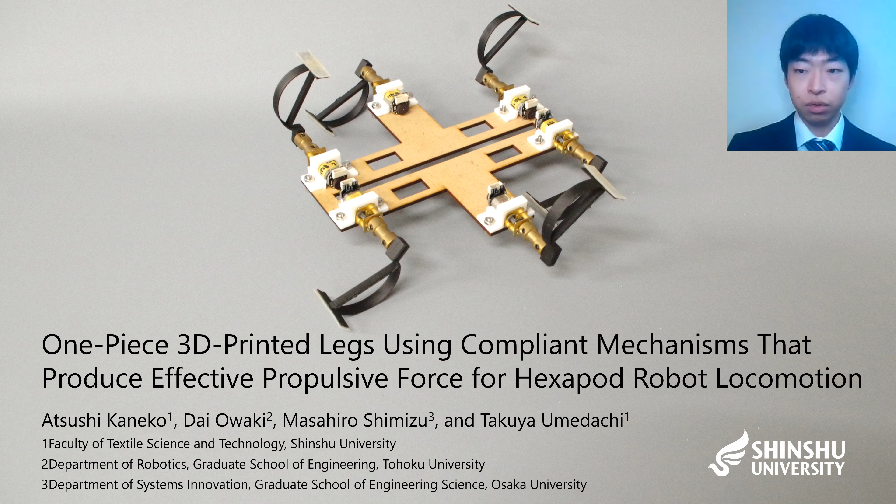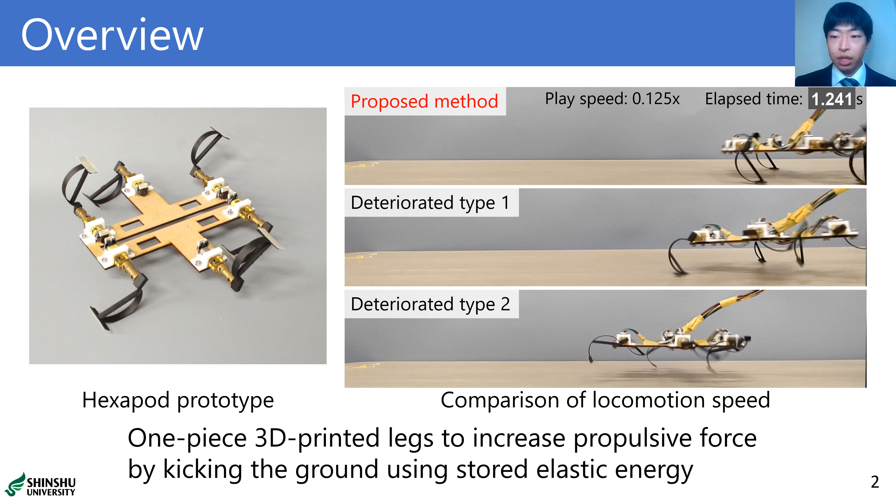We propose a leg design method for a hexapod robot that increases the propulsive force by kicking the ground using elastic force. Almost all parts of the leg can be 3D printed in one piece. Experiments are conducted to compare the proposed leg with deteriorated types. As shown in this video, some of the results indicate that the proposed leg improves the locomotion speed.

Let me call this spring stiffness the vertical stiffness in this presentation. Robots with high locomotion performance such as RHex were developed by adjusting the vertical stiffness closer to that of the animal.

In contrast to these studies, we aimed to develop a leg that increases propulsive force using elastic force with low fabrication cost.

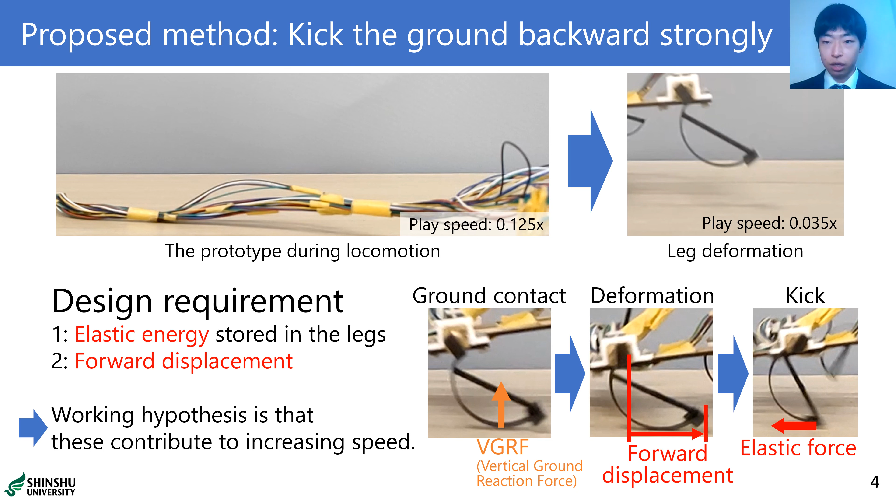Now I will explain how to achieve it, the proposed method. The concept is to increase the propulsive force by kicking the ground strongly backward using the elastic energy stored in the legs. We will explain this method using the locomotion of our hexapod robot.

Two candidate design requirements were devised to increase the propulsive force. The first is that the legs should store a larger amount of elastic energy when the ground reaction force is applied, to kick strongly. The second is that the toe should project forward at the moment to generate backward elastic force. The amount of this displacement was defined as forward displacement. The working hypothesis is that these design requirements contribute to increasing robot speed, and this is tested in the experimental part.

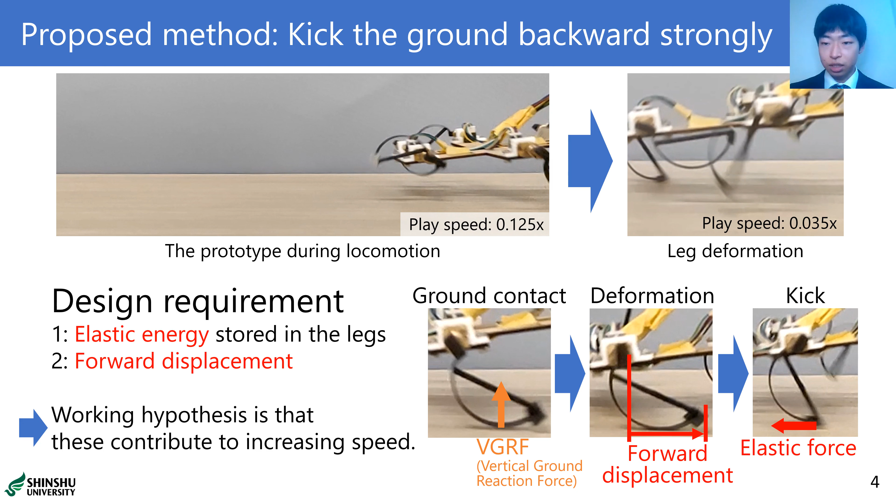Now let me move on to how to model a leg to conduct physical simulation. The leg consists of an I-shaped beam and C-shaped part, and a rubber part is attached to the toe to reduce slippage during the kicking motion. The entire leg is modeled as torsion and linear springs. The robot rotates its legs in this direction during locomotion.

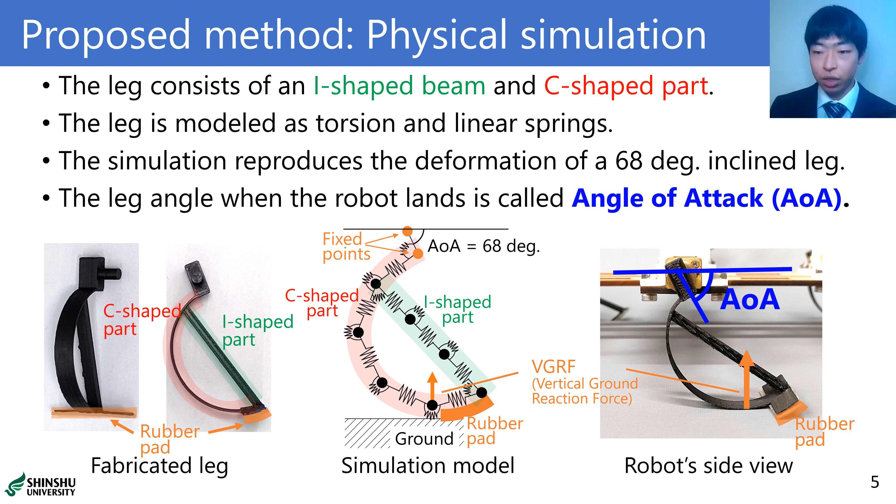A static simulation is performed to reproduce the deformation at the moment when the leg is inclined 68 degrees with respect to the ground. This is because we assume that the contact point shifts to the rubber part at this angle. The leg angle when the leg contacts the ground is called the angle of attack, which is one of the parameters of legged robots. In other words, the simulation best reproduces the leg deformation when the angle of attack is 68 degrees.

We then combine the simulation with multi-objective optimization. We use the 3D CAD system called Rhinoceros and its plugins for the simulation and optimization. This platform contains a physical simulator which simulates consequent deformation and a genetic algorithm for the optimization. This is an example of a Rhinoceros simulation.

The following three objective functions were set in the optimization. The first is to maximize the amount of elastic energy stored after deformation. The second is to maximize the forward displacement. The third is to make the vertical stiffness of the legs similar to that of an animal.

The following three values were set as optimization variables. First, the stiffness of the torsion springs in the I-shaped part. Second, the stiffness of the torsion springs in the C-shaped part. And third, the I-shaped part arrangement. Candidates for arrangement of the I-shaped part are represented by the green lines.

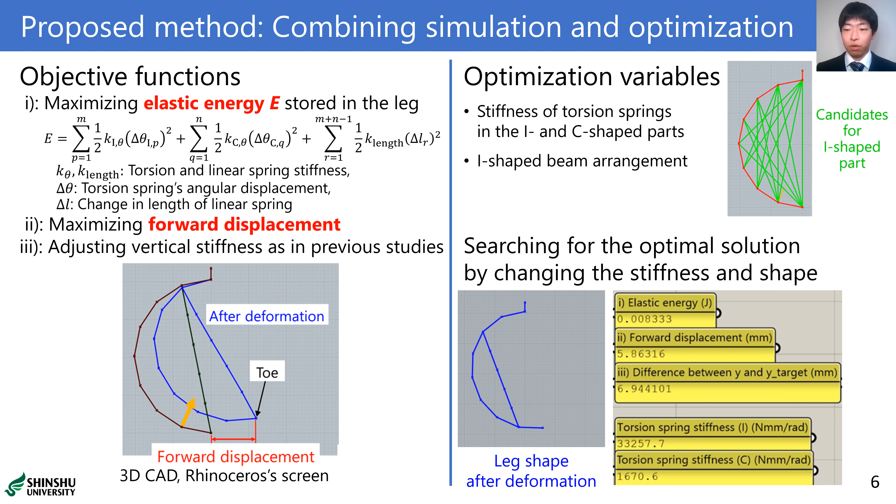Based on the simulation and optimization, we fabricated three types of legs: the optimized leg, and two deteriorated types for comparison. The whole leg, except for the rubber part, was 3D printed in one piece.

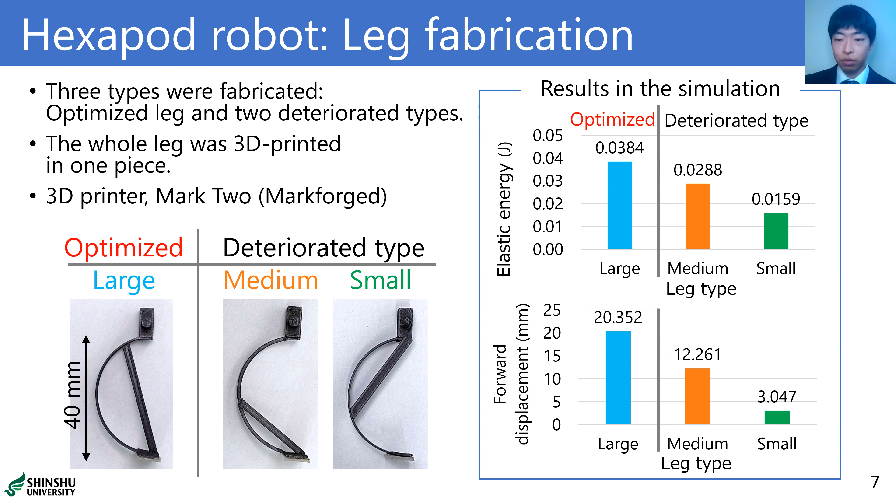The right plot shows each type's elastic energy and forward displacement obtained by simulation. The leg fabricated to achieve the shape and stiffness obtained by optimization is named large, because the optimized leg has larger elastic energy and forward displacement in the plot. The deteriorated types of legs are similarly named medium and small.

We implemented a control to adjust and specify the angle of attack to study the effect of leg deformation and angle of attack on locomotion performance. The angle of attack affects locomotion performance.

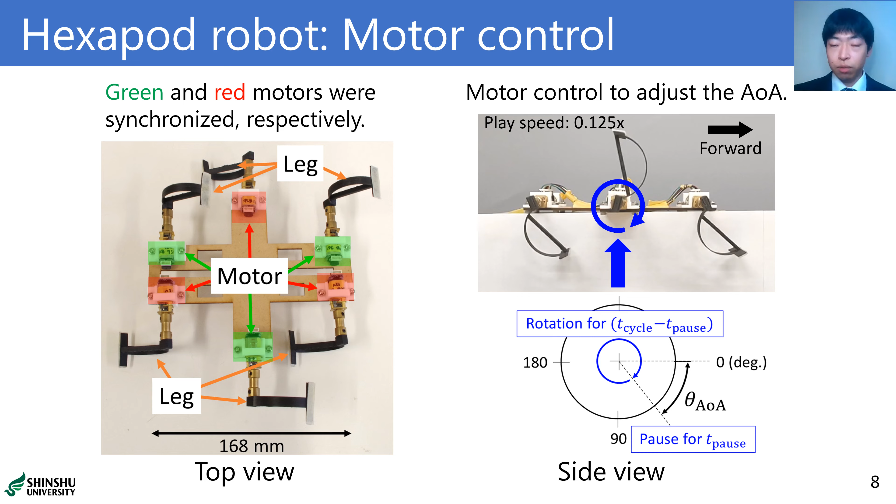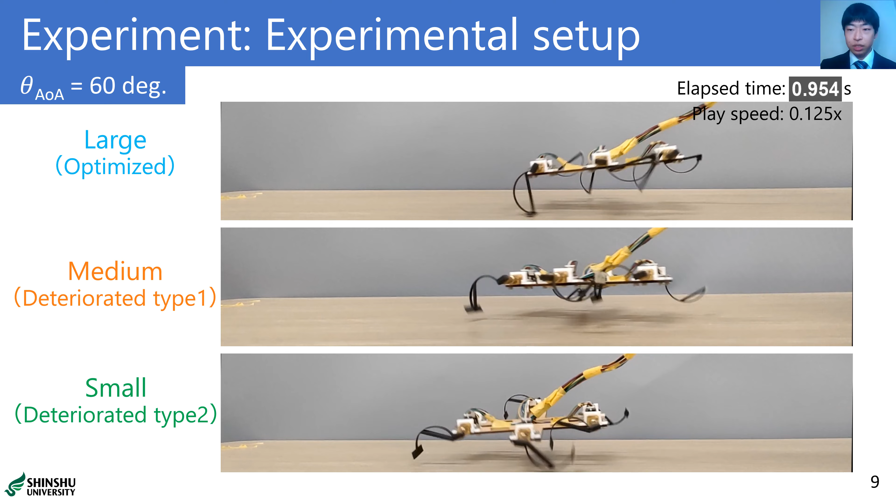Now I will describe the experimental setup. We conducted the experiment to investigate differences in locomotion speed by varying the leg type and the angle of attack.

Here are videos of the experiment when the angle of attack is 60 degrees. The robot traveled for 5 cycles in each locomotion experiment. The locomotion experiment was repeated 3 times for each setting. Then, the mean and standard deviation of the locomotion speeds were calculated.

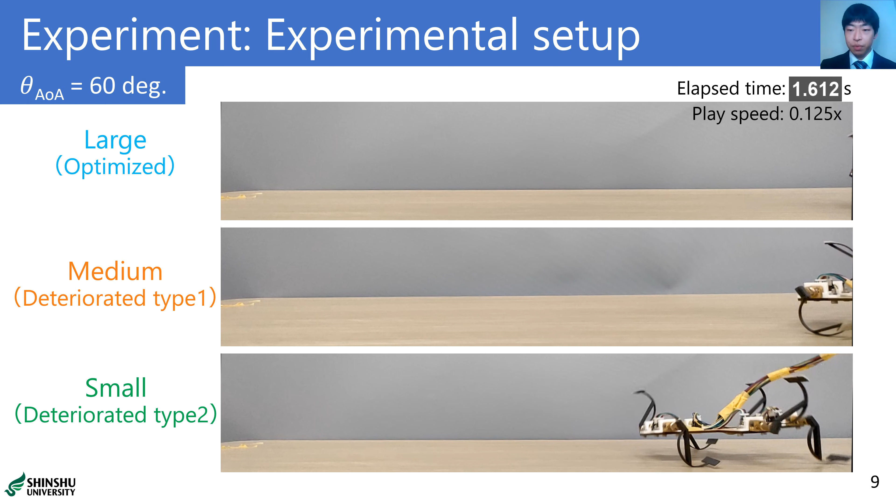Before summarizing the results, let me explain the analysis of the time variation of speed. The graph shows the change in locomotion speed in the experiment on the previous slide. The period during which one motor group pauses is shown as gray in the plot.

Near that period, the legs made contact with the ground, resulting in a decrease in speed. When the motor group started to rotate again, the legs kicked the ground, then the speed increased. The moment when the speed is the lowest near the pause period is defined as the beginning of a kick. Meanwhile, the moment when the speed is the highest during the motor rotation is defined as the end of the kick. The mean and standard deviation of the speed difference before and after these kicks were calculated.

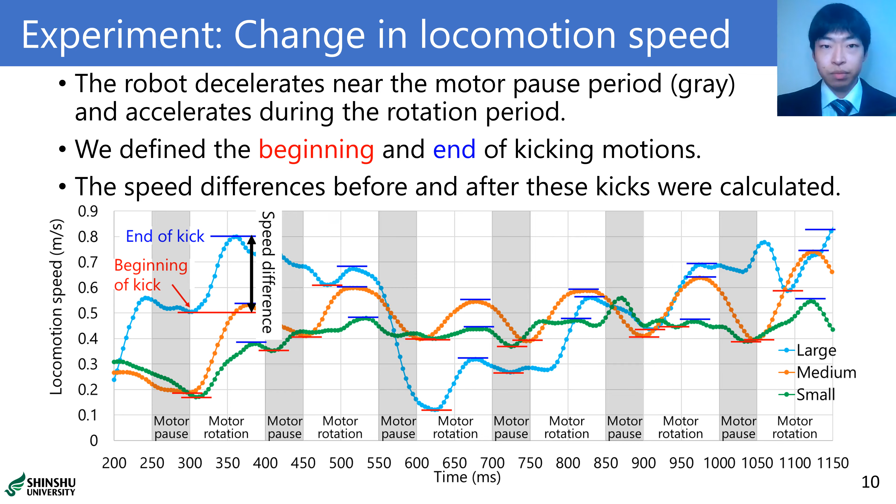Finally, I will conclude this presentation. We proposed a design method for one-piece 3D printed robot legs to increase propulsive force by kicking the ground using elastic force. We demonstrated the function of kicking the ground in experiments using a hexapod robot.

This study suggests that soft robotic parts with various functions, such as hands and arms, can be designed using continuous deformation and one-piece 3D printed parts.